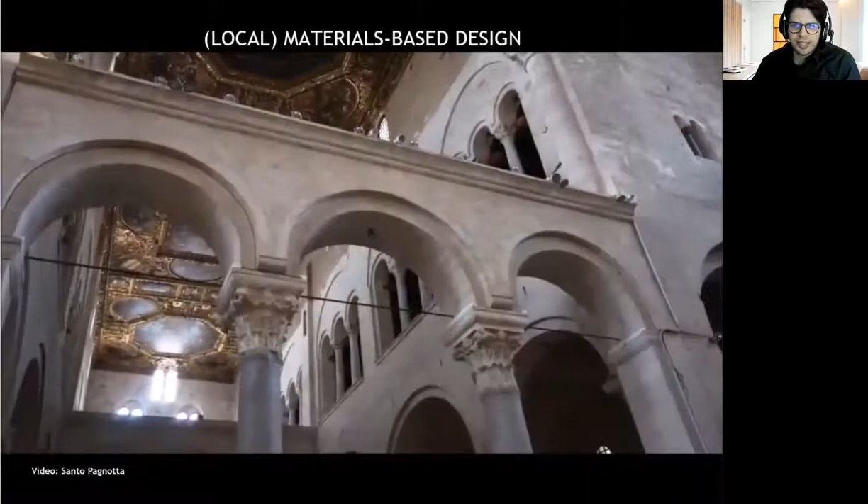And I'd like to start my presentation talking about the place where I come from, because I was born in a region called Puglia in the south of Italy that is characterized by the millenarian use of stone for building architecture. This is the Bari Basilica, the Basilica of my city, which is the best example of Puglian Romanesque architecture from the Middle Ages. So to me and for the people coming from certain regions of Italy, like Sicily, like Puglia, it's common to talk about stone, to talk about vault structures, you know.

And I've started this presentation this way because I believe we should design in different ways depending on where the building is located. I know it's not always possible in modern times, but I think it's important to study the characteristics and the materials of local architecture prior to starting designing, in order to preserve and evolve the history of local identities. I think it is important, and for this reason, it's important to start from history.

So knowing the history of construction, the history of architecture, can be a good starting point also for doing innovative design. It's not something related only to the study of historic structures, historic architecture, but this can be a good starting point for new design and innovative design processes, I think. This is particularly true for stone architecture because it has centuries of history behind it and a huge heritage that constitutes some of the best architectural examples of the past.

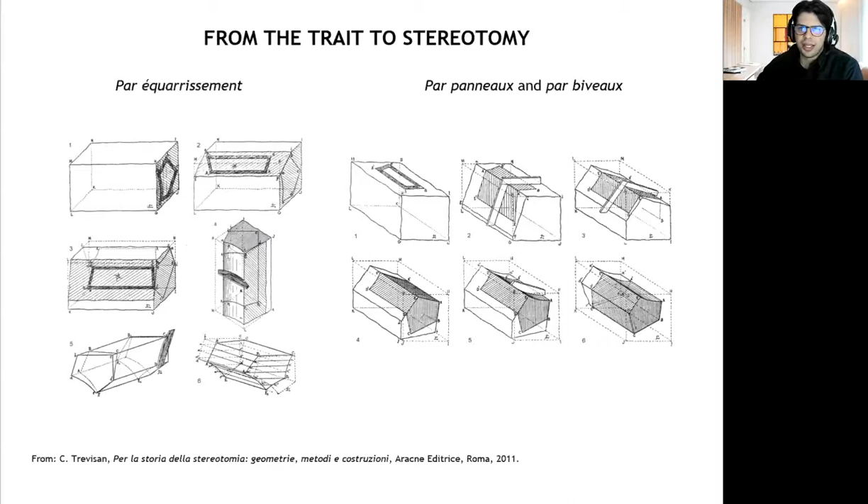Stone stereotomy is well known in the history of construction and architecture, and the term was coined for the first time by Jacques Curabelle, but the history comes from the Middle Ages, from the stone master masons who built cathedrals in France, for example. Stereotomy derives, as I said, from the medieval stone cutting techniques, which have also evolved to allow the optimization of the voussoirs production, the stone blocks, and the creation of more complex architectural shapes.

It is particularly useful to use stereotomy techniques when we need to build complex geometries and when we need to control them from the early design phase. So when you build something complex in shape or in its building elements, it's very important to control both the whole shape, the general shape, and also the geometry of the constituent parts. So stereotomy is not only a tool, it's a way of starting to imagine a new type of architecture. It can sound a bit strange, but you will see that maybe it's true.

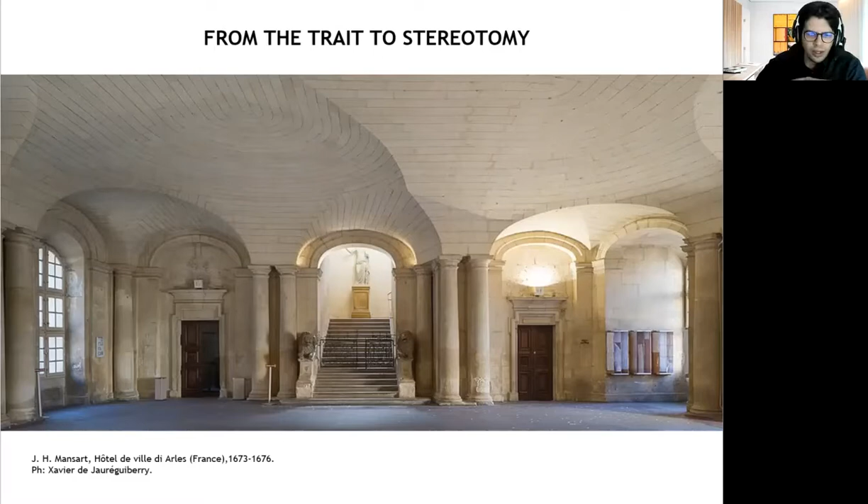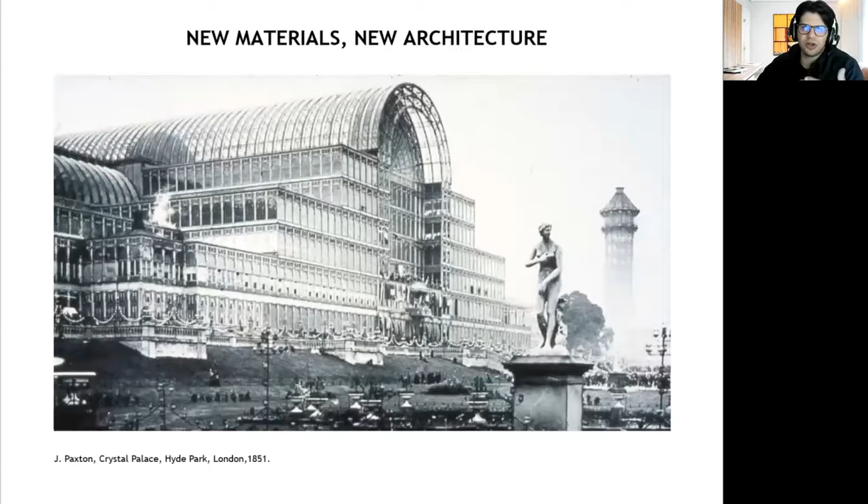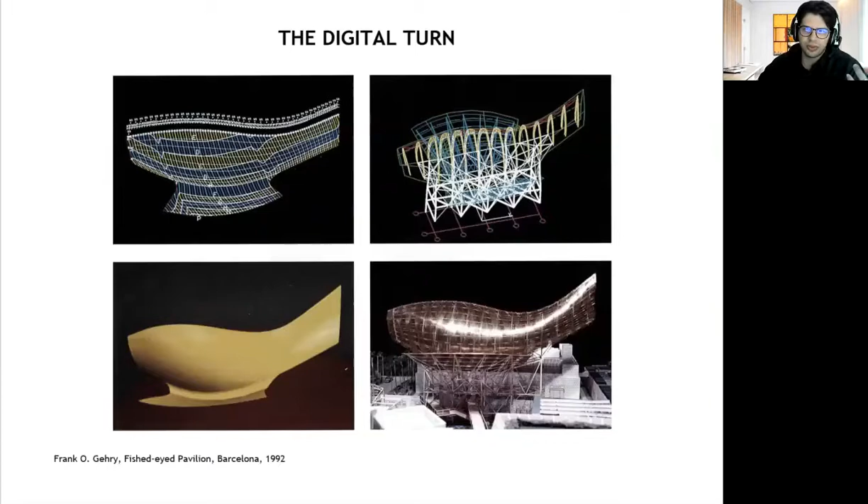But I go fast. The event that changed the recent history of architectural design is certainly the digital turn, which has given the ideal conditions to overcome the contraposition between modern and postmodern architects. The massive diffusion of computers for design has completely changed the reference paradigms of the discipline, I think, finally allowing the development of new architectural languages deriving from new design methods.

Why am I saying it? Because I think that this passage, this historical turn, the digital turn, has created the ideal conditions to renovate, to innovate, to use again some old practice like stereotomy, because it's strictly related to architectural geometry, and most of the computational and parametric design processes are related strictly to architectural geometry, also to the optimal production of blocks of building elements. So there is a strict relationship between architectural geometry and fabrication, and that is an important aspect that stereotomy has always faced.

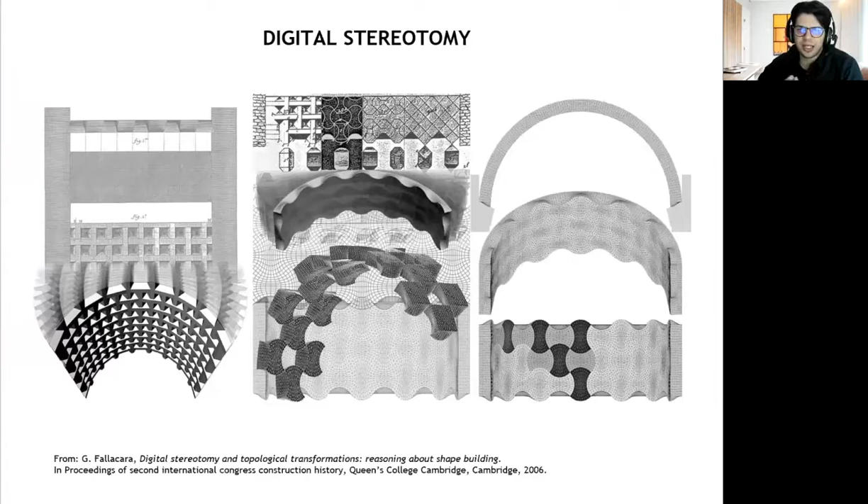As an architect and designer, I've started to think about how to take advantage of these digital tools and how to find a way to express their potentialities. In the same years, the introduction of digital technologies led to the development of digital stereotomy, which is an update of the discipline made possible by the spread of parametric modeling tools and CAD/CAM fabrication systems. Today, in the scientific literature, the term stereotomy is used in a broader sense because it has partially lost its traditional association with stone architecture, approaching the definition of science of cutting solids without any reference to a specific material like in the past with stone and timber.

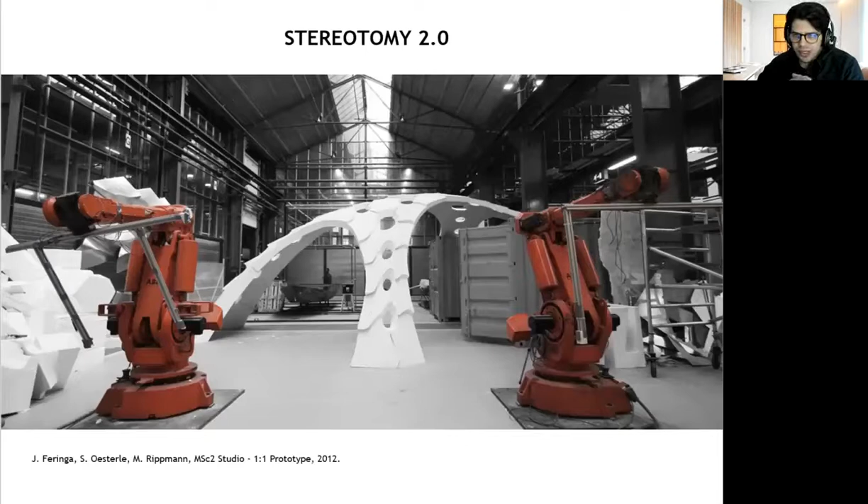This is what they call Stereotomy 2.0, and in 2018 with my former supervisor Giuseppe Fallacara, I edited an entire volume of the Nexus Network Journal about Stereotomy 2.0, which included an unfinished manifesto. In this contribution, we stated that Stereotomy 2.0 is closely related to the use of digital design and manufacturing tools like robotic arms. We also affirmed that with Stereotomy 2.0, we should investigate the unexpressed possibilities of the discipline and overcome the limitations imposed, for example, by individual materials. Maybe we can use composite materials born from the union of materials with different characteristics.

And in this sense, I've been lucky in the last years to collaborate with companies and other designers in the realization of several prototypes in different fields, such as architecture, digital crafting, and industrial design. In the field of industrial design, for example, I've supported the company Generelli, a Swiss stone and marble manufacturing company, in the design and realization of some experimental projects, in order to show the possibilities opened by the use of thin marble reinforced with carbon fiber. The carbon fiber has been used to absorb tension stresses, so we have been able to reduce the thickness of the stone and make it thinner and lighter.

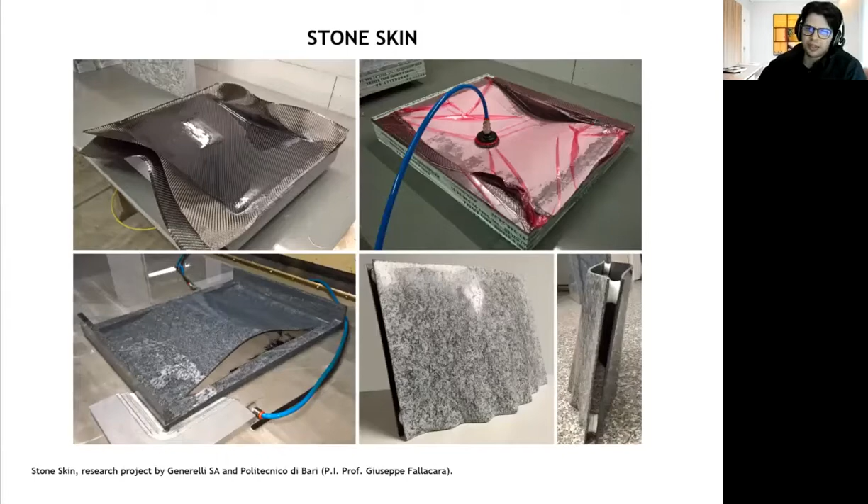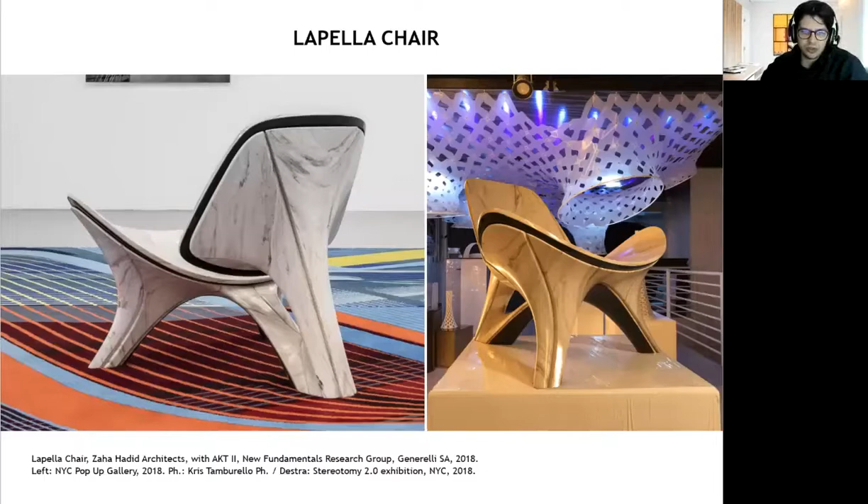The fabrication process is based on the freedom permitted by robotic fabrication and employs vacuum bonding to join carbon fiber layers to thin marble, granite or stone. The most notable example of this research is the Lapella chair, designed by Zaha Hadid Architects with the support of AKT II, an engineering firm from London, and my research group, the New Fundamentals Research Group, and realized by Generelli. The Lapella chair has been exhibited in New York City at the Stereotomy 2.0 exhibition. Due to the free-form shape of the chair, we carved the constituent parts from several small solid blocks.

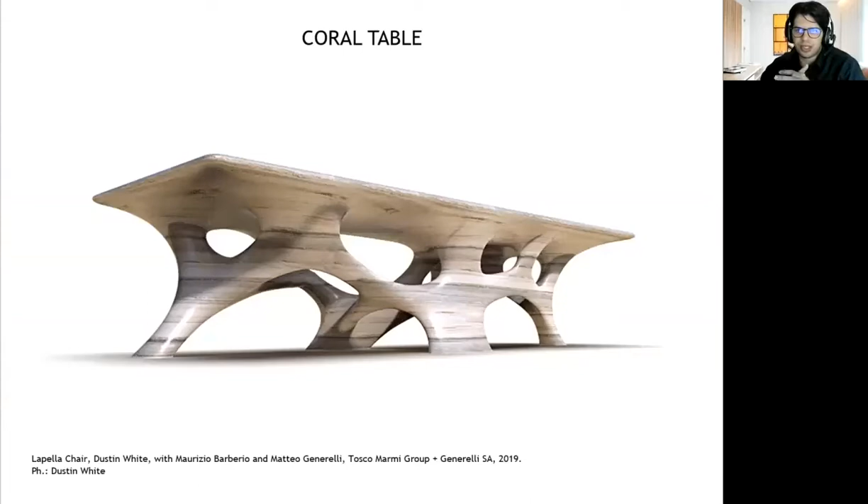Another project I worked on is the coral table that has been exhibited at Marmomacc Verona in September 2019 and has been designed by Dustin White with my support and fabricated by Generelli for Gruppo Tosco Marmi. We proposed a large format table design featuring a continuous woven minimal surface geometry to be fabricated in Palissandro marble,

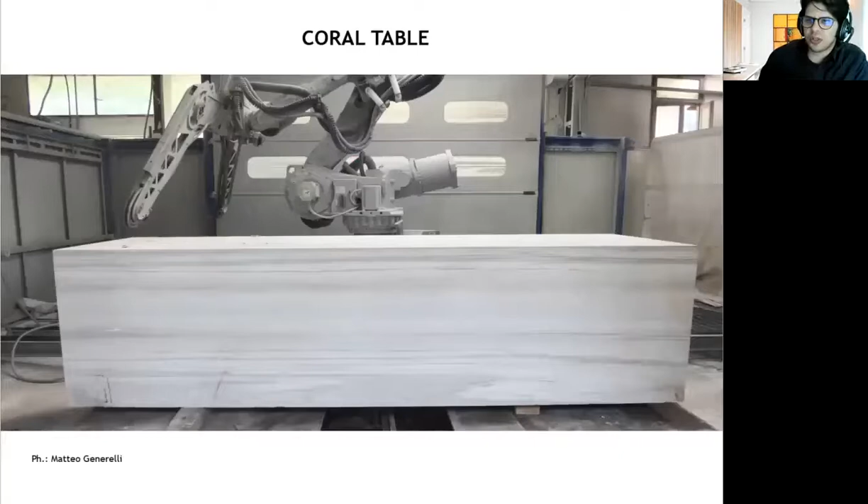which inspired us to design an organic shape, taking inspiration from phenomena like erosions of the rocks and coral reef growth patterns, so biologic and natural phenomena. And we started from a single solid block of Palissandro marble, so very true subtractive processes. And we cut away some parts of the block by using wire cutting.

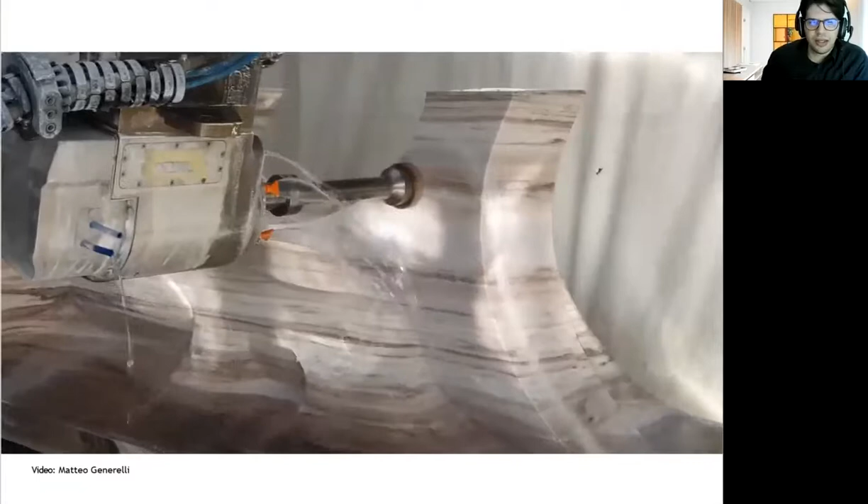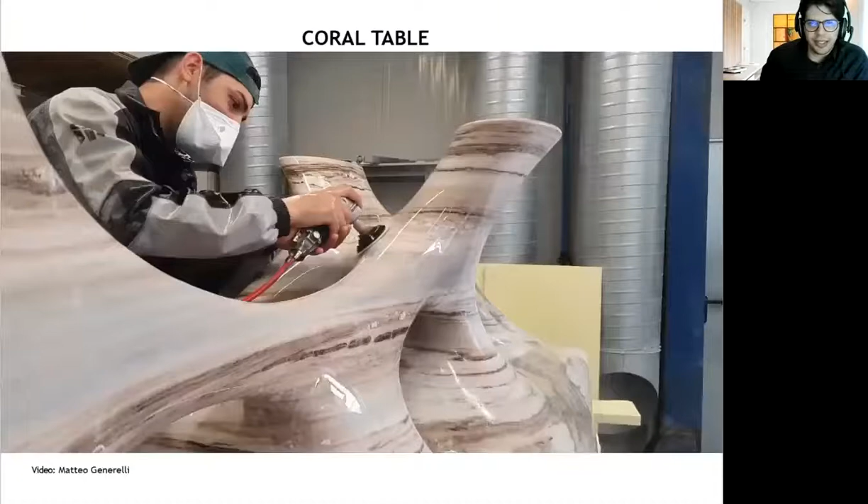And after that phase, the robotic arm milled away the marble layer after layer. So it is a long process. Very, very long. You can see the robot in action. And the interesting thing is that after the raw process made possible by robotic fabrication, the final polishing has been done by hand by highly skilled artisans.

And I think it is an interesting aspect because in the stone marble field, nowadays there is a merging of traditional and handicraft skills and the most advanced robotic and CNC processes. I think this is very interesting because at the end you have a hybrid product that contains the characteristics of the robotic and the CNC processes and also the human touch. So this is very, very interesting.

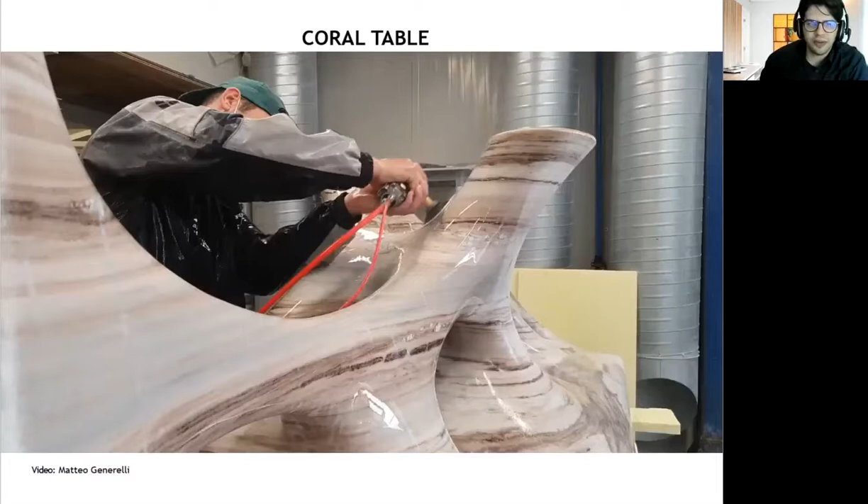In this case, we designed it for an exhibition that aimed to highlight the uniqueness of stone and natural materials from the imitative materials like synthetic stone or porcelain or glass, some materials that are used in architectural projects to imitate stone, to imitate marble.

And in this case, we started from something that you cannot imitate because it's a huge block of marble, and the geological stratification of this block has been modeled by the organic shape. So we have a combination of history of geology with the new techniques, new design processes. So I think it's interesting.

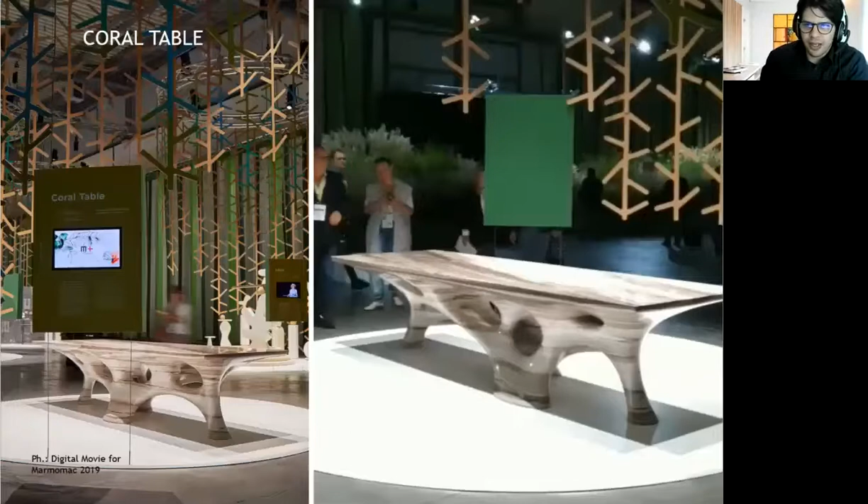This is a quick video given during the exhibition in Verona. We were excited to show the table because, as I said, it's a perfect example of blending between robotic and artisanal skills, which is a key aspect of the evolution in stone design and fabrication that I mentioned previously.

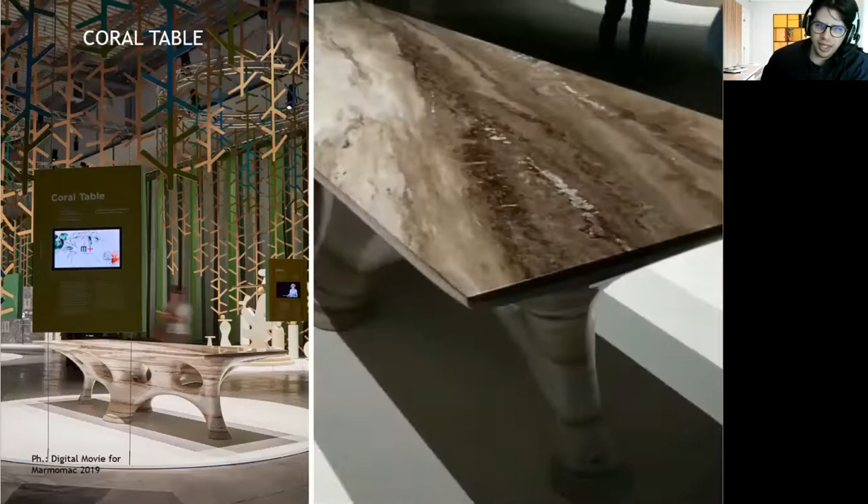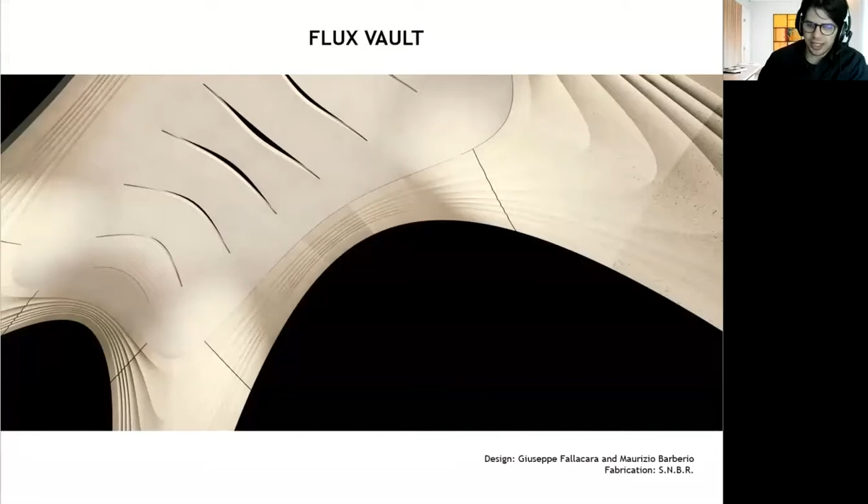The next project that I want to show is the Flux Vault. That is a vaulted pavilion designed in collaboration with Professor Giuseppe Fallacara and the French company SNBR. The pavilion has been the representative stand of the SNBR company during Rocalia in 2017 and also in 2019. Rocalia is the French fair dedicated to natural stone, and it is held in Lyon every 2 years.

Flux is, I don't know, if we define it, a vaulted structure. Maybe it's a blending of 4 arches, but it covers an area of 36 square meters and has a maximum height of about 3 meters and 20 centimeters. The shape of the structure derives from a base structure formed by a network of catenary curves in such a way to make the vault subjected almost

only to compressive stresses. That is a key aspect when you design something that is built in stone, because stone has a very high resistance to compression stresses, but very low resistance to tensile stresses. So it's important to control the shape of the structure. It's important to control the thickness, because we need the forces and the stresses all around the structure to not affect the equilibrium of the structure itself. It is very important.

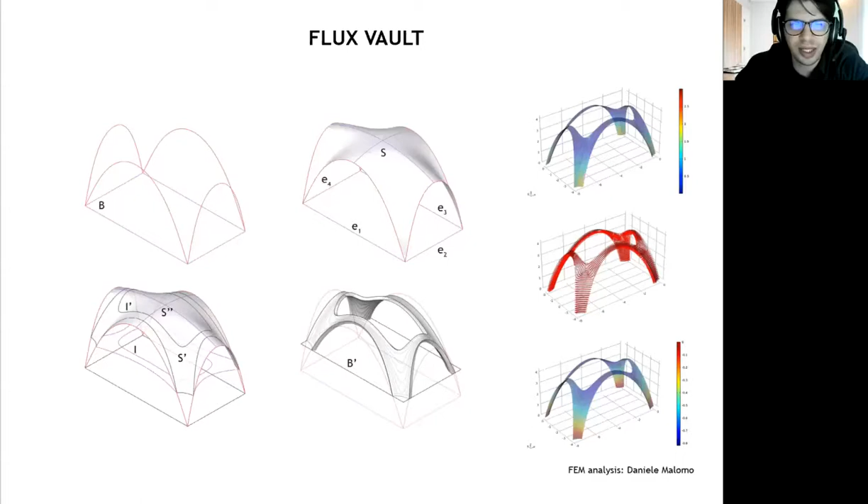So that's why we base the design shape on catenary structures, because using catenary curves we can control better the equilibrium of the overall shape, the equilibrium of the block. But another very important aspect in this case was the speed of construction of the vault, because we had only 1 day to build it.

And there are other 2 important aspects to face with this project. One was it was not possible to use a falsework, so we used a structure, you will see, that was made from supports, not using a true falsework. And another aspect was to design the blocks in order to lift them using very limited instruments.

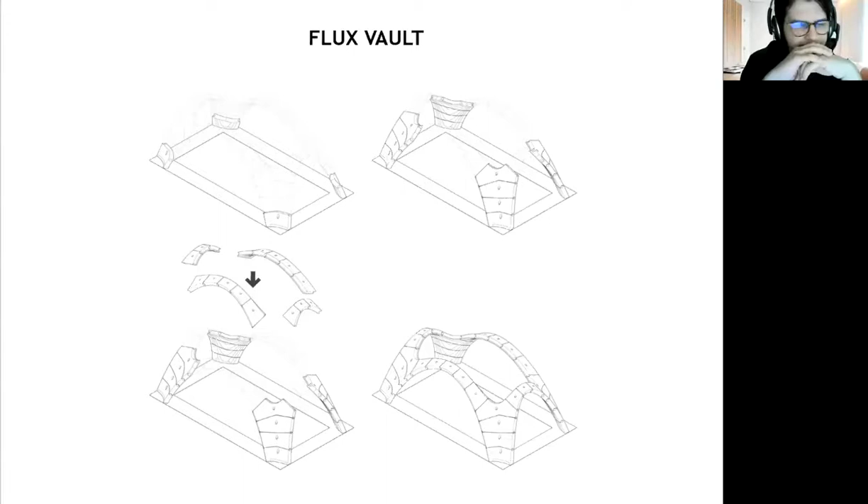Each block has been designed to weigh less than 500 kilograms, which is not too much using stone, to facilitate assembly and to be produced by using robotic fabrication tools. And another important aspect of the project is that each contact face among the various voussoirs presents metal fixing systems. It has a bolted fastening system placed here on the plates and at the outer edge of each block.

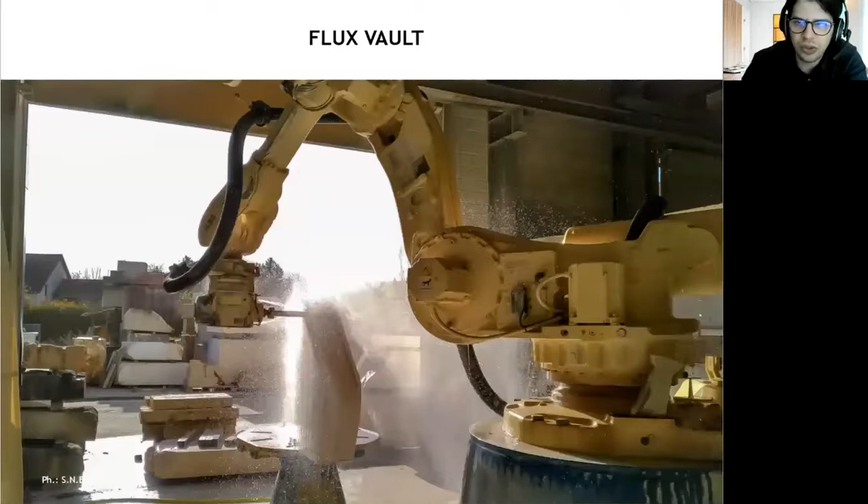And due to the complexity of the stone blocks to be produced, robotic fabrication is the most appropriate technique to use, because we used wire cutting to cut the contact faces between blocks, which are completely flat, and we used also milling for carving the overall shape of the blocks and their sculptural aspects. You can see here that is a relevant factor in this project. Maybe there is a video here or not. No.

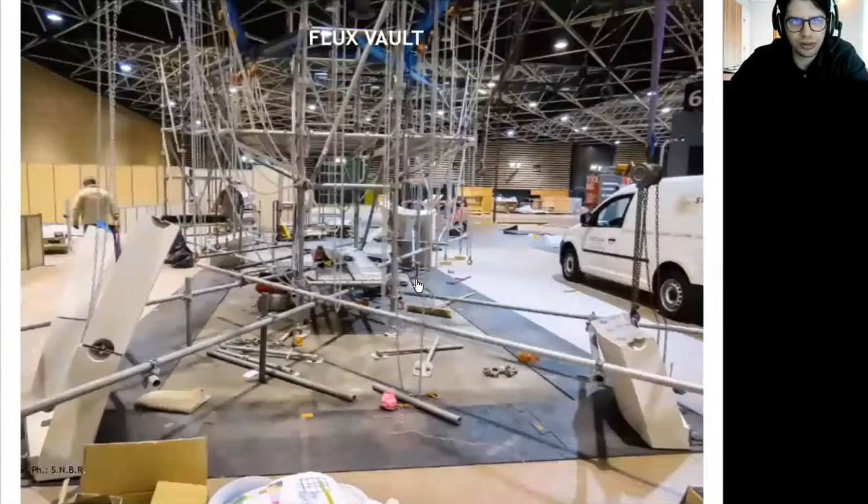Okay. I thought that was a video. Not sure.

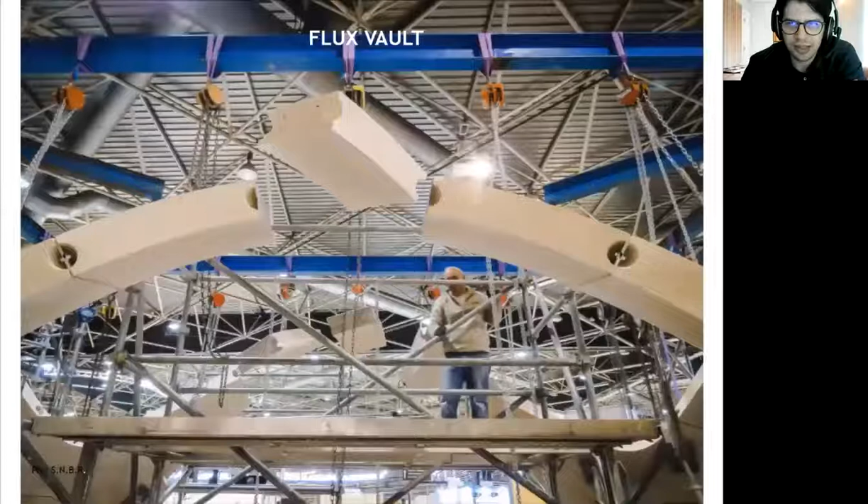Okay, yes. The precision allowed by robotic fabrication is a key aspect of this project, also for its construction, because the details we designed have permitted us to assemble the structure in just 2 working days without producing waste in scaffolding. In fact, each voussoir was lifted from above and temporarily attached to a metal frame structure placed above the vault, and each stone block was positioned and mechanically fixed to the subsequent ones until the keystone was placed in position.

This is a new construction technique in stereotomy. We experimented with this prototype for the first time, and it has proved very efficient. I think it has also improved the mechanical behavior of the structure, because this kind of metal plates, metal fixing system, has made the structure more elastic, which is a bit strange concept related to stereotomy structures or masonry structures, because they have to be very, very rigid.

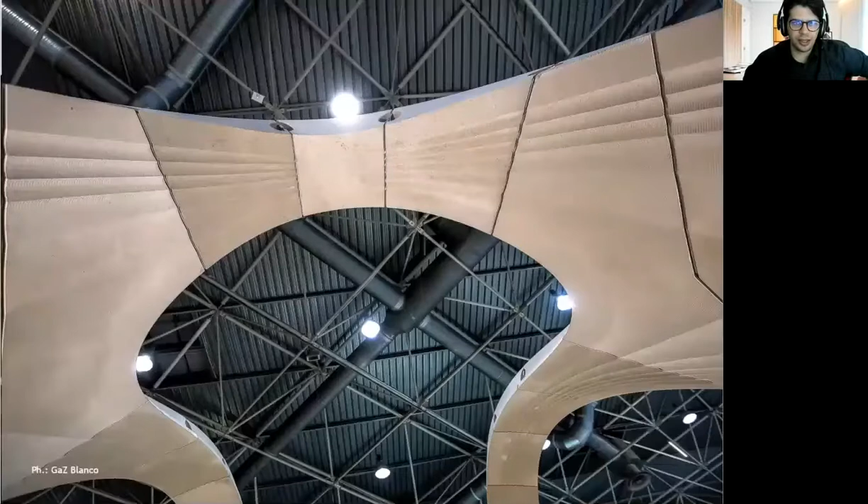In this case, we combined the rigidity of the stone, but also the possibility of micro movements between blocks. And it was a very great experience. Also because the fabricators, the SNBR company, were very skilled both in robotic fabrication, very precise, very perfect, I can say, and in assembly, which is very important, because if you have perfect blocks but you're not able to assemble them together, you surely will not get the ideal result. So this aspect is very important in architectural construction.

The sculptural relief of the intrados recalls the flow of internal forces of the structure. So it's like a representation of the structural behavior of the pavilion, and they proceed from the arch to the ground seamlessly. On the other hand, the presence of the sculptural relief intends to enhance the technical capacity of the latest generation of CNC machines. And on the other hand, they represent a possible way to revamp the sculptural tradition that has always characterized stone architecture in a contemporary way.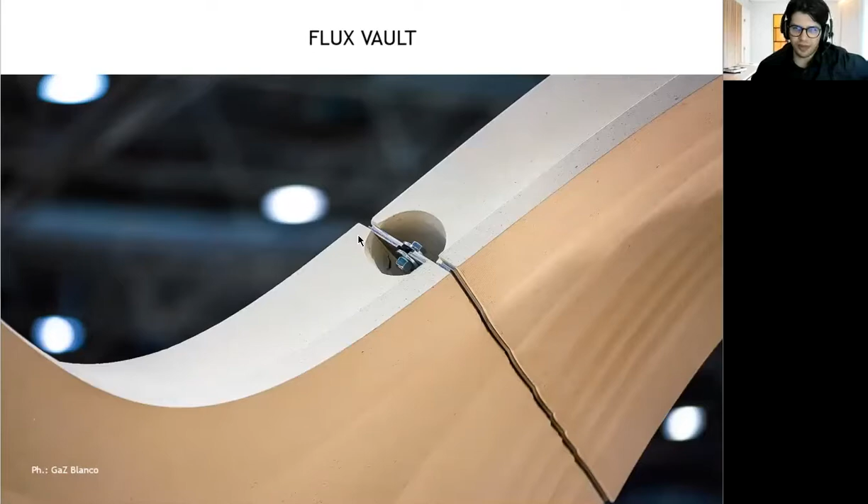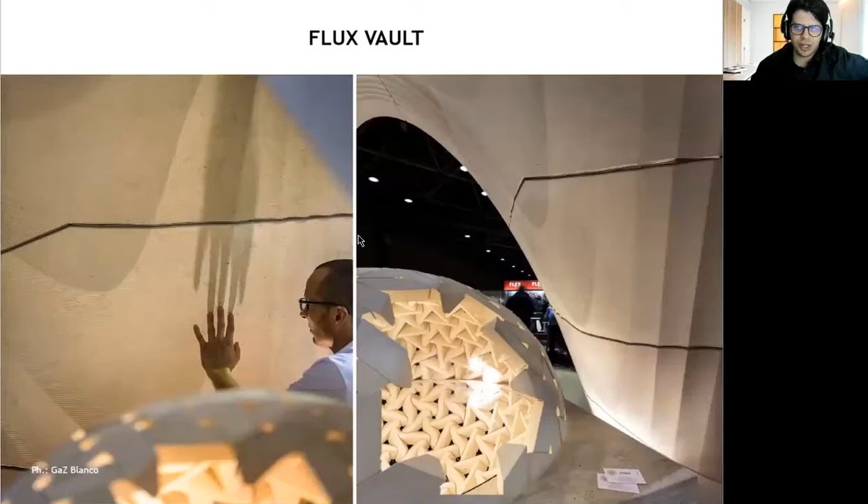There are some pictures of the finished pavilion and some detail pictures. You can notice the very high precision of the robotic manufacturing and the details of the metallic connection between blocks. These are other pictures taken during the Rocalia fair in Lyon. You can also see the interaction, the tactile exploration from the audience, which is another very interesting aspect when you use digital technology, because we may think that something produced with digital technology is perfect, but it's not true. Here it's possible to notice the milling layers, the milling path that the robotic tools leave on the stone surface, and it's interesting to explore them by touching. So I think this is a fascinating aspect to highlight.

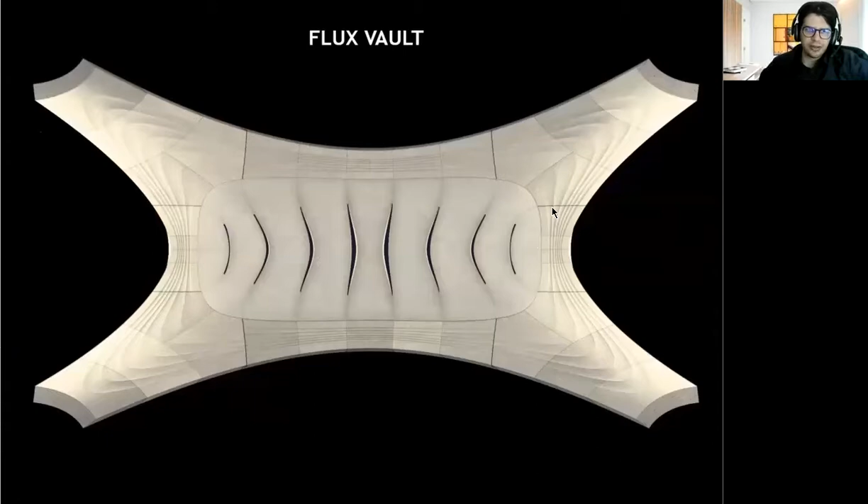In the initial project, we also designed a cap to be made by micro concrete or 3D printing. However, for budget and time reasons, the top of the vault has not been realized yet. I think it will never be realized, really. But I'd like to show it, because maybe we have a bit of contrast between the two parts, but I think contrasts are also interesting in architecture sometimes.

Another option would be to continue to build the cap by following the contour lines of the structure, as you can see in this picture. I think this is a good option to optimize the construction of this kind of pavilion, because in this way we can install the arches first, and after that continue layer by layer to place blocks until the structure is finished, always using very limited and reversible supporting structures, and not using falsework, which is always a problem, because it's like you have to build two structures: the support structure that at the end you have to waste, and the structure itself.

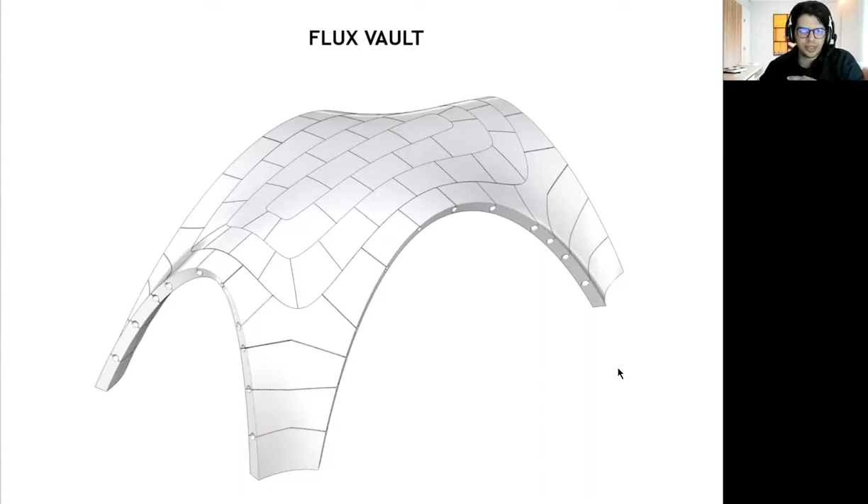So I think, in order to make this kind of structures and architecture more sustainable in terms of budget and also environmental aspects, it is better to make some efforts to avoid the construction of waste materials, waste falsework, I think.

Other pictures have been taken during the Festival Européen de la Pierre two or three years ago at Château des Rohan in Saverne, which is a very good location for this kind of project, because we are in a historic context. And the same vault probably made more trips than me in the last years, and has been built again at the Venice Biennale. The pavilion is currently exhibited there, in the installation curated by Professor Giuseppe Fallacara, called Porzione di Infinito, namely portion of infinity. So if you go to Venice, you can see it, and maybe you can send me some pictures.

But if subtractive techniques seem just the digital update of the handcrafted techniques used for centuries for classic stereotomy, additive manufacturing techniques are opening new scenarios for the discipline. I go fast. Projects developed with subtractive techniques are characterized by a series of critical issues. Maybe you noticed some of them during my presentation, because we have to deal with limitations in the fabrication of complex shapes, waste of material, and its appropriate disposal.

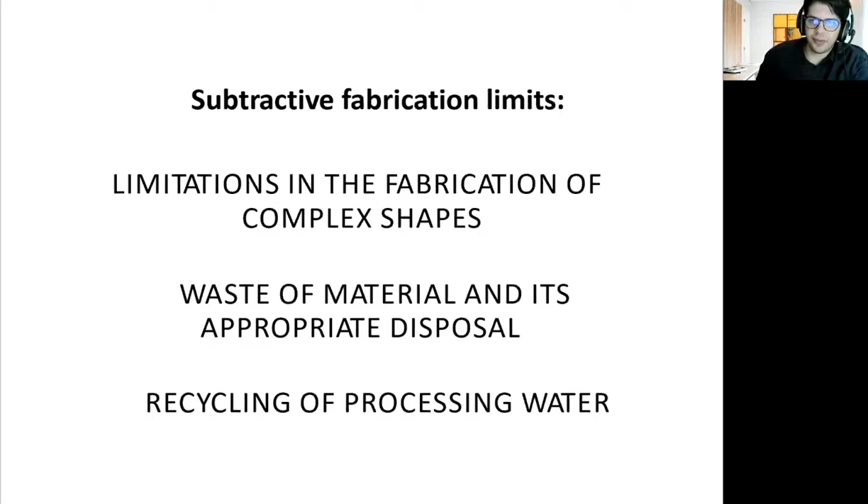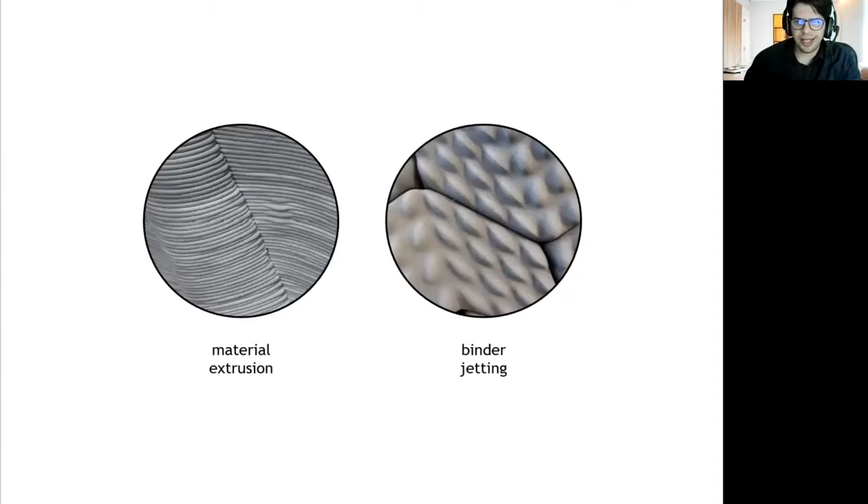Waste of material and its appropriate disposal, and also recycling of processing water. Many of these limitations could be overcome with the transition to additive manufacturing techniques, I think. Today, further methods and tools for additive manufacturing have been developed, characterized by the use of different materials and different manufacturing processes, to which corresponds a degree of precision appropriate to the scope of its application. In the field of construction, in my opinion, the most suitable additive manufacturing techniques are material extrusion and binder jetting. We will see some examples now.

The different approaches to additive manufacturing can be classified into four categories: extrusion of wet compounds for the manufacturing of monolithic buildings, extrusion of wet compounds for the manufacturing of discrete elements, solidification by layers of powders for the manufacturing of, again, monolithic buildings, and also for the manufacturing of discrete elements. Now, additive fabrication of monolithic buildings aims to bring down costs and construction time, realizing ever bigger 3D printers. This is an idea that is currently on the stage.

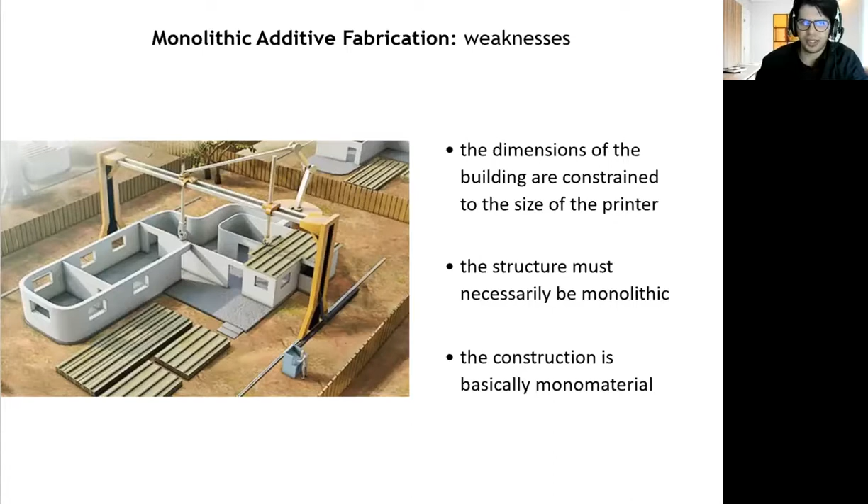However, this objective poses, in my opinion, several critical points, because the dimensions of the building are constrained to the size of the printer. Obviously, the structure must necessarily be monolithic, and the construction is also monomaterial. So I think these are weaknesses of this kind of monolithic additive fabrication process. In contrast, we can also use discrete additive fabrication, which has a lot of potential, because it opens up the possibility of working extensively with non-standard products conceived and created for a specific project. So in terms of mass customization, they are very good. And with the use of materials that are more appropriate to the nature of the project, or, also an important aspect, locally available.

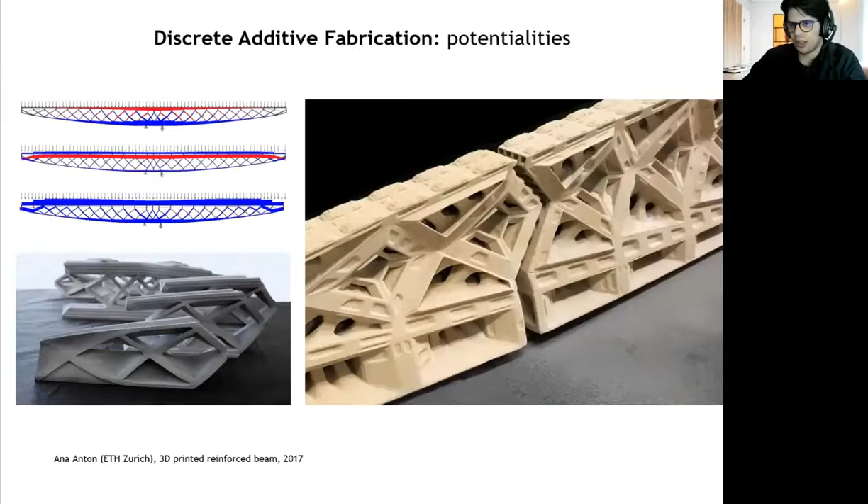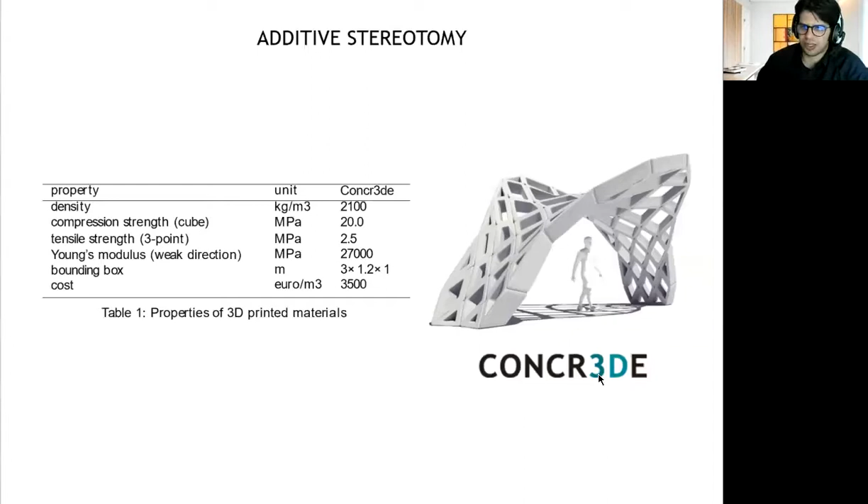The main idea that we had was to design a big open space, which is not so common in stereotomic architecture, covered by a series of adjacent arches. So we have not a true vault system, but a shape made of stereotomic arches.

And these arches under permanent load are thought to be statically independent to form a sort of false vault. I know it can sound a bit strange, but the use of side-by-side arches allows the creation of free-form barrel vaults in which the overall shape of the structure is not conditioned, is not constrained by the static functioning of a traditional vaulted system.

Because, you know, traditional vaulted systems have to follow a precise shape because we need them to stand and not collapse under the load. And sometimes it's not always possible. It's impossible to have, for example, anticlastic shapes. But maybe we are interested in exploring these kinds of shapes for architectural reasons. So static structural behavior is not the only relevant aspect in architecture. Maybe we aim to explore other aspects, other kinds of shapes, other kinds of forms.

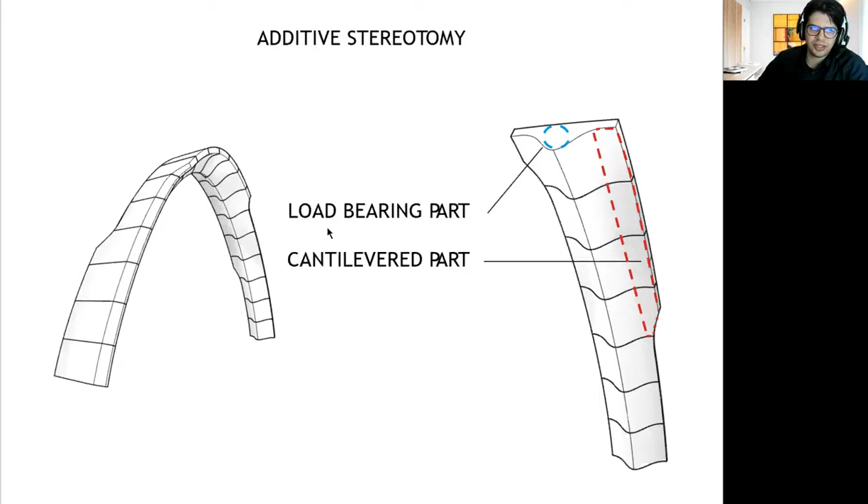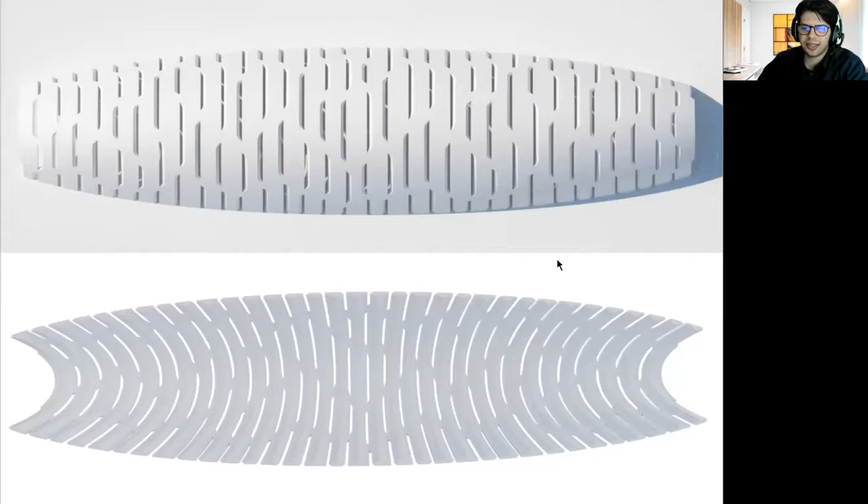The variety of these cantilever parts makes the variability of the openings, which is another difference from classical stereotomic shapes, because they are usually completely closed, since we need to create the structural equilibrium by friction between all the blocks. In this case, we have independent arches, so because they are independent, we can create some openings between them, and the structure stands.

The cantilevering side parts can be shaped in such a way as to create differentiated openings to permit natural light to come in. At the same time, we can imagine inserting artificial lighting systems integrated into the structure. And the project was developed internally in Grasshopper to create a close synergy between parametric design and computational engineering.

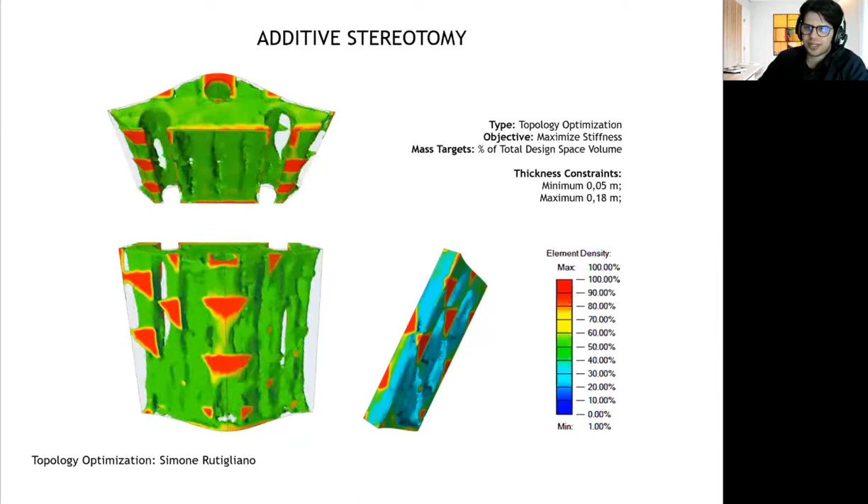Another idea we explored was to make these blocks topologically optimized. We have worked with Simone Rutigliano, former graduate student in architectural engineering, on topology optimization of the voussoirs in order to achieve constant stress by using material only where it is needed. The entire arch is pre-stressed by tendons to deal with live loads and allowing the assembly and disassembly of the arch. And Summum Engineering with Diederik Veenendaal determined the shape of the arch and the volume fraction of the voussoirs to achieve constant stress, as well as the amount of pre-stress to keep them in compression under external loads.

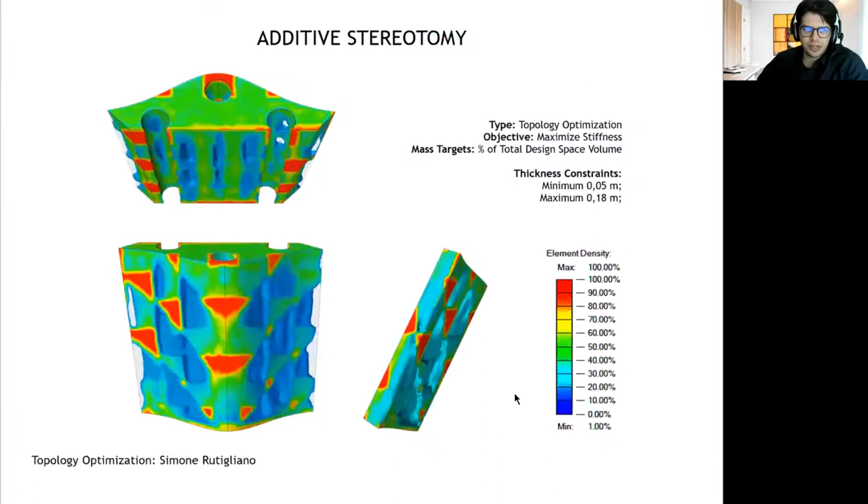You can see these percentages are related to the volume fraction inside the blocks. So the idea is that the shape of the blocks outside is completely full. It's like we have here, you can see the shape completely full, but inside the volume of the blocks changes every time depending on the position of the block itself and depending also on the amount of loads to be faced by the block.

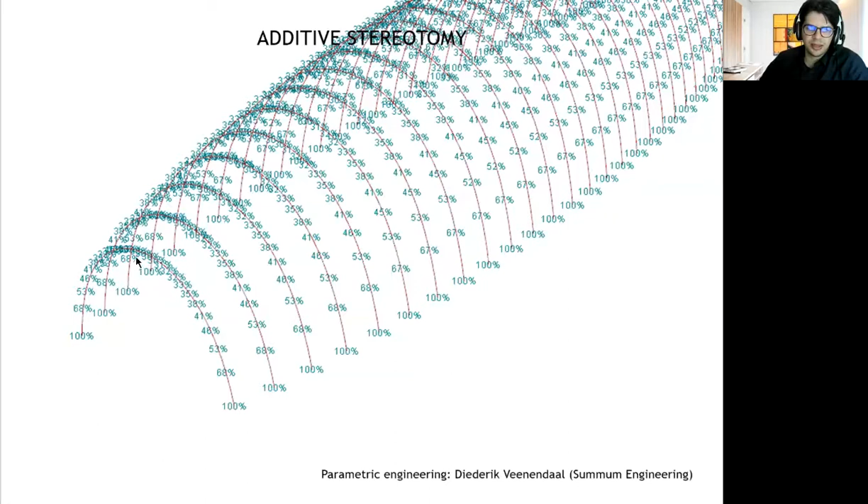And in the lower part we have blocks that are almost completely full or full. And in the middle of the arch, we have blocks that resist less stress, so we can have less volume. Maybe they are emptier.

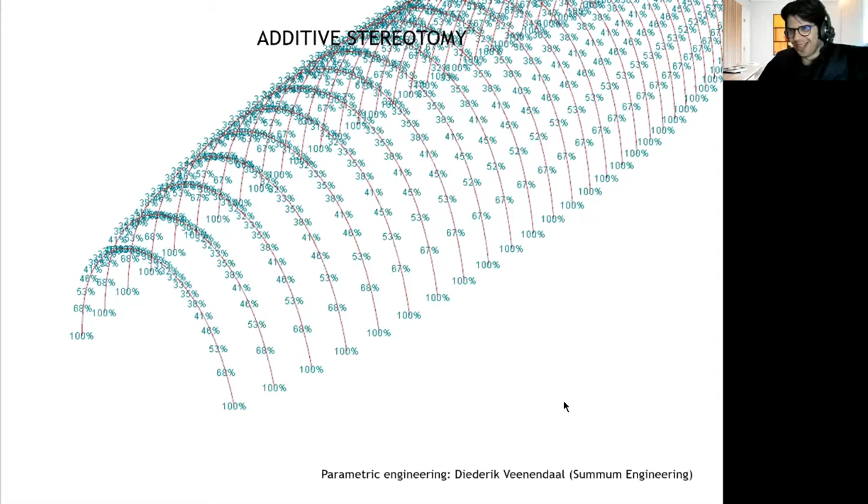I have to explain it to make it understandable. It's not so easy for me to explain in English, so I hope I have been clear. Sorry? I totally feel your pain about explaining something in English that is not your mother language. Yeah, it's not my mother language, but they are also a bit complex to explain in Italian. So the idea is not so easy to explain.

But thank you. The first design application of the construction system has been presented in the exhibition Stereotomy 2.0, held in 2018. Okay, thank you, Rebecca. 2018 at the New York Institute of Technology.

The project you will see is a kind of robotic re-proposal of the famous National Library project designed by Boullée. In our project, we have placed servers and supercomputers along the basement instead of books, as contemporary analogs for the preservation of human knowledge. We had this idea to represent the project.

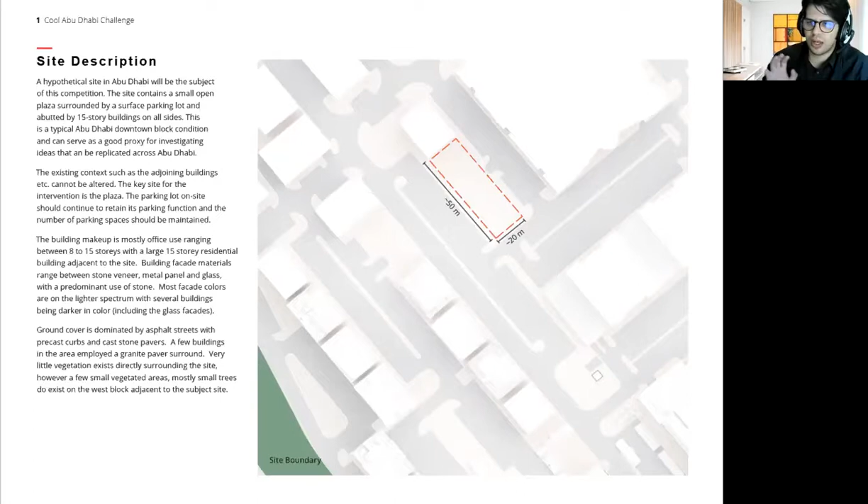In this case, we had a specific site, a specific project schedule, specific project goals, because the project was developed as an entry at the Cool Abu Dhabi Challenge, an international call for designing a new model of covered urban space in Abu Dhabi in order to face the problem of the urban heat island. So in this case, stereotomy has been used as a framework to face a climatic issue.

Due to the urban heat island effect, the city center of Abu Dhabi is estimated to be several degrees Celsius warmer than the surrounding natural environment. You can see here the difference. The temperature of the soil is almost double that of the surrounding environment. And solar absorption and re-radiation from the surrounding context, as well as the anthropogenic heat released by cooling the buildings, and the lack of air movement result in a felt temperature much higher than the prevalent air temperature.

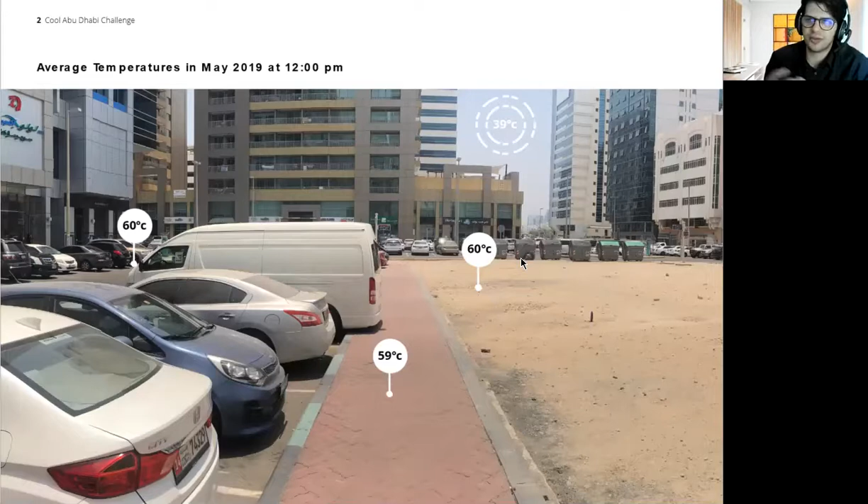So when we stay in these countries with a very hot desert climate, we perceive a temperature that is higher than the real one. So this is a problem, because people don't use urban spaces for this reason. They move from a building to another building. They move by car, but they don't live the city outside. So for this reason, we need to design something that is appropriate to face this problem.

Our design process started from the deep awareness of the climatic context of Abu Dhabi and Emirati traditional architecture, which is composed of elegant vaulted structures, vernacular shading devices, cold water basins, a lot of very interesting and cool elements from the past. If you see Islamic architecture, very interesting. The fact is that they don't want to use them anymore. They prefer to do something that comes from Western civilization, you know.

I don't know if it's stupid, but I don't agree, because they have a very special, very interesting architectural heritage that they could probably reuse or evolve.

A message in the chat. Yeah, that's me. I'm saying I don't either. And I think that it's a trend in all big civilizations to leave aside their heritage and just turn into either Western or contemporary architecture at some point and leave aside all the parts that they built in centuries. Mhm.

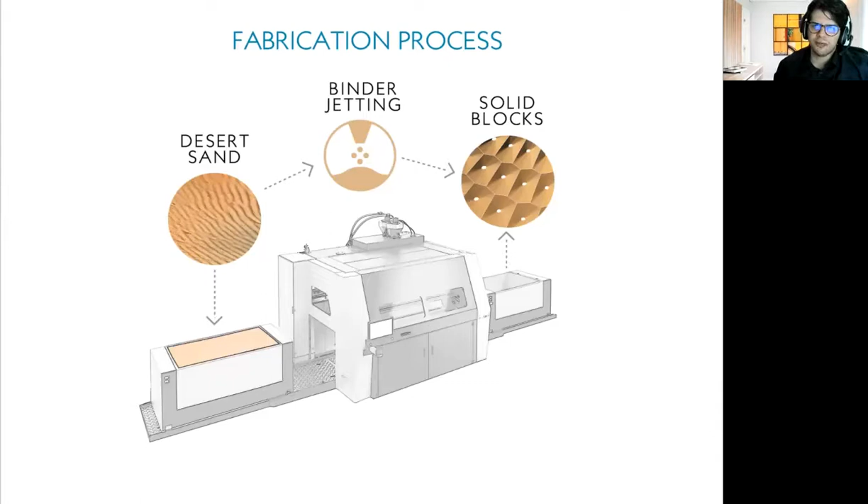and this desert sand can be processed using a binder jetting 3D printing fabrication process, and at the end we can maybe obtain solid blocks, a sort of 3D printed sandstone. And this sandstone can be used as a material to build a vault structure. And this was our idea. It's also very interesting because

Can you hear the music? No, okay.

So yeah, it's not important. If you go to the ExOne YouTube channel, you can maybe see this video. It's a bit long, but it's interesting because they explain how it's possible to set up a factory made of 3D printers that can work together, a big factory of 3D printers that can produce a lot of these kinds of blocks, for example, to use in the construction field.

And again, the concrete printer that I mentioned previously for the additive stereotomy project has developed this big 3D printer that can produce very big blocks. They are specialized in the production of 3D printed blocks for architectural purposes. Because most of the other 3D printer producers maybe use them for rapid prototyping or to make stamps, something that is not appropriate for use in construction, but they are focused on the production of blocks for architecture, which is important for us.

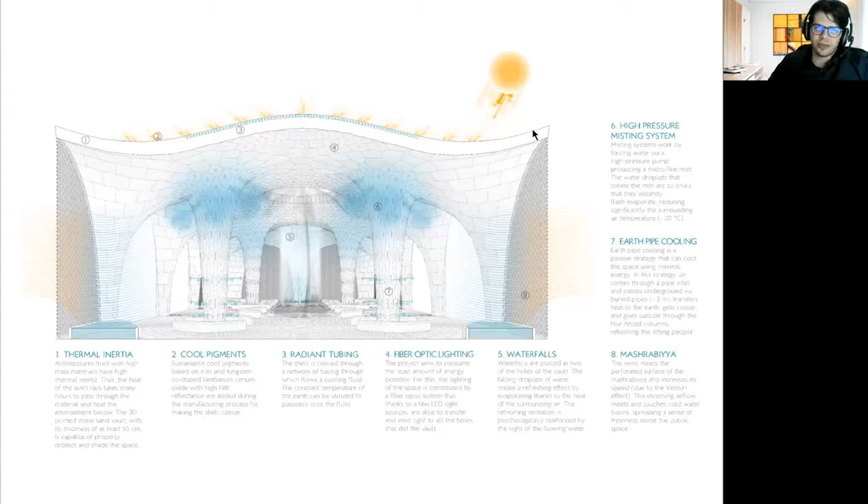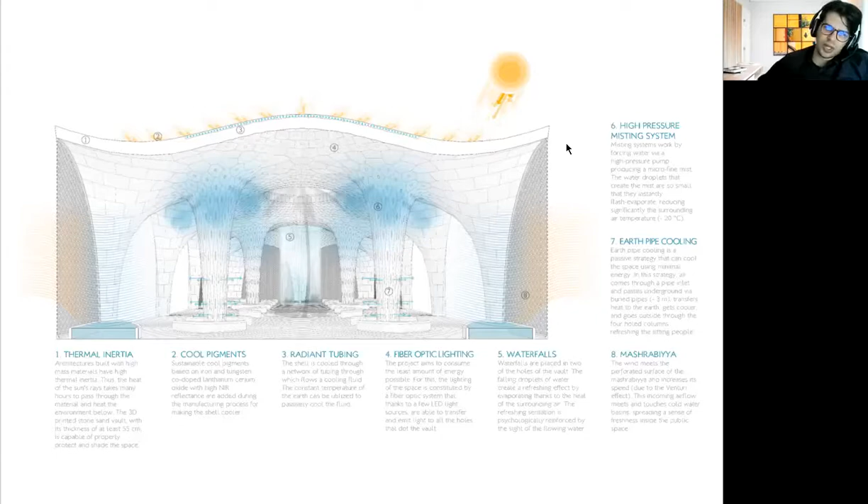So first, when you have a very, very hot climate, the first action you can take is to protect the inside of the urban covered space by using very massive materials. So stone, sandstone, that are very appropriate for this use. And the sand is mixed with heat reflective cool pigments to increase the surface reflectance and to reduce surface heat build up, also reducing energy consumption through lower cooling requirements.

The space below the vaults represents an urban microclimatic space protected from the sun using a vernacular sun shading device, the mashrabiyya, which also enhances the natural ventilation of the space. So the ventilation can pass through the mashrabiyya, but the sun a bit less. The wind meets the perforated surface of the mashrabiyya and increases its speed due to the Venturi effect. This incoming airflow meets the cold water basin all around the space, spreading a sense of freshness inside.

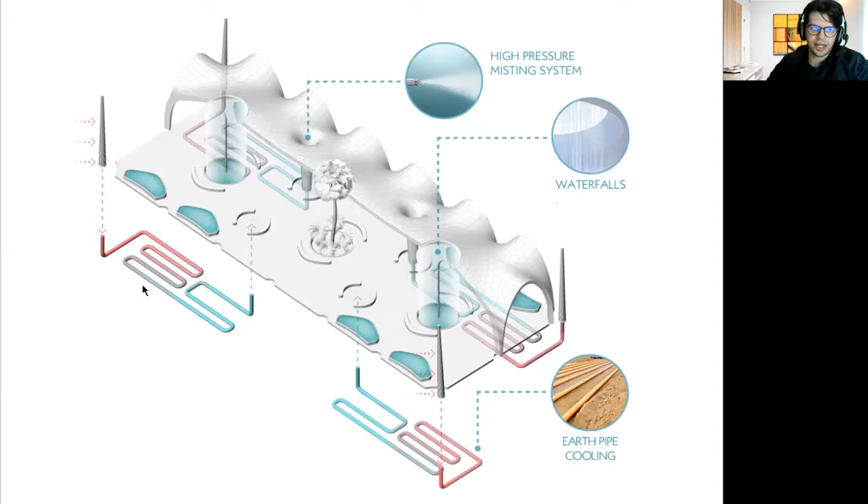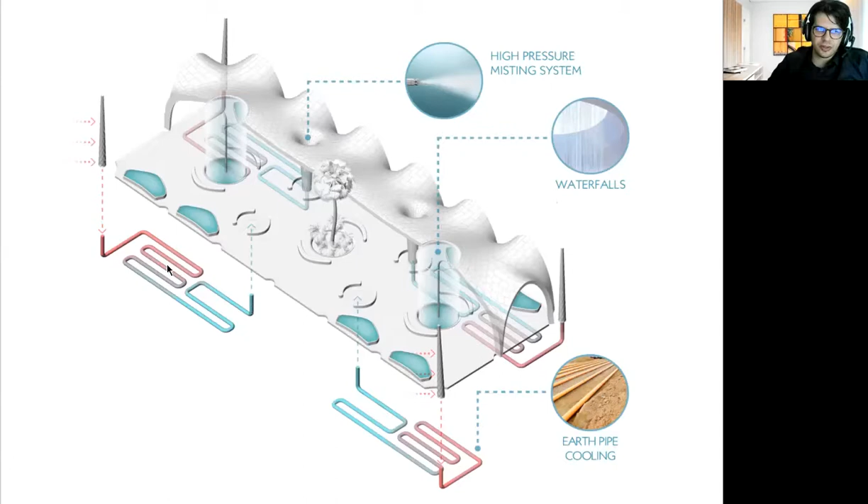In addition, the urban space under the shell is also naturally ventilated with low-tech systems such as earth pipes. We have a mini wind catch tower here. They collect the prevalent winds, and the air passes through this earth pipe, which is fresh because it is inside the ground. It is a low-tech system that can cool the air naturally, and after the air has been made fresh by this process, we can use it to refresh the inside of the vault.

That's why we have these openings here. The openings seem like a decorative part, but in reality they are made to put fresh air inside. Also, we have integrated a high pressure misting system to reduce the temperature inside the vaulted space by forcing water via a high pressure pump, producing a microfine mist. So we use several bioclimatic or low-tech devices in order to make the inside fresher.

I thank Angelo Figliola, who performed the environmental analysis, which certified that by mixing those systems it is possible to reach a UTCI of 26 degrees Celsius for the month of August, the warmest month in Abu Dhabi. That represents a really comfortable thermal perception for an outdoor space.

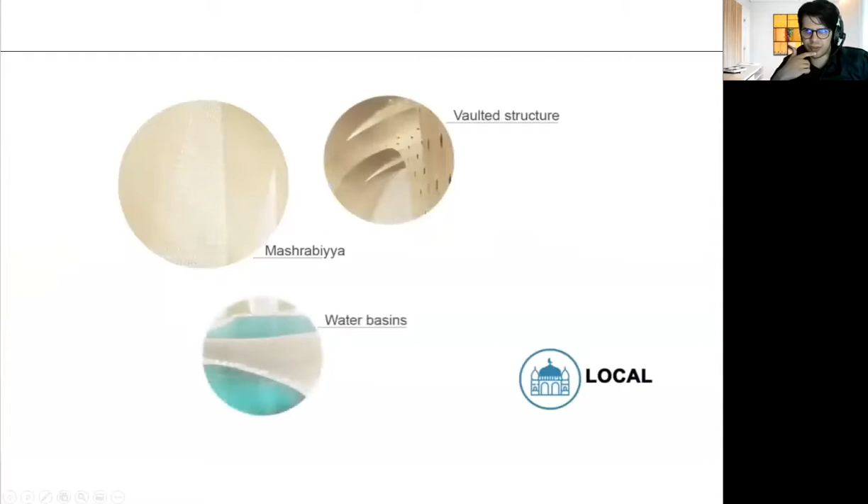This is a short video we prepared for the competition. We didn't win the first prize. We were only awarded an honorary mention, but it was a great recognition, I think, because we know it was a very experimental project, so to be awarded an honorary mention was great.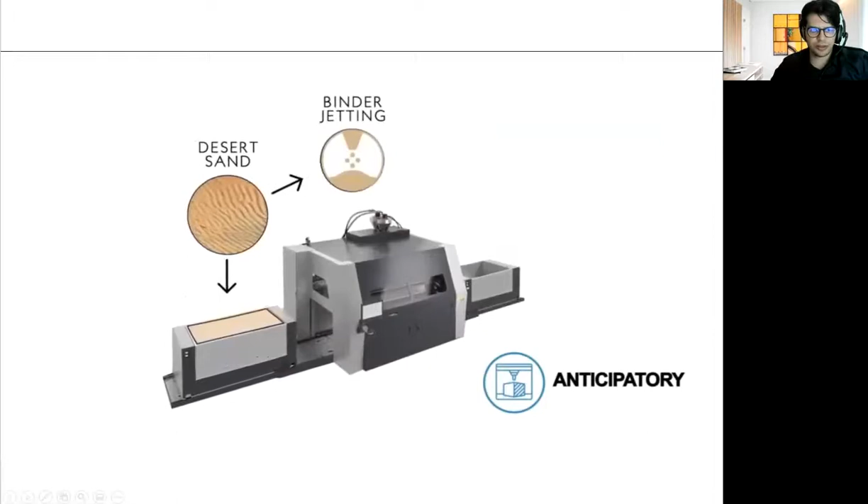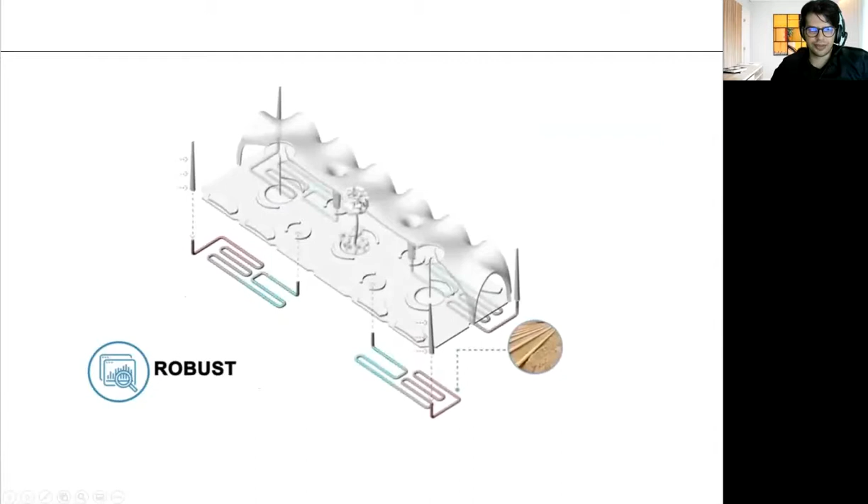I'm sorry, you can hear the music. There is an Arabic soundtrack.

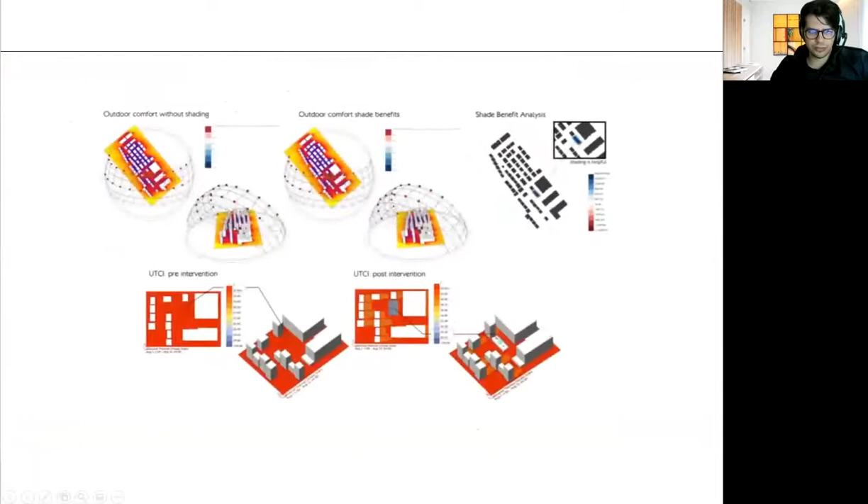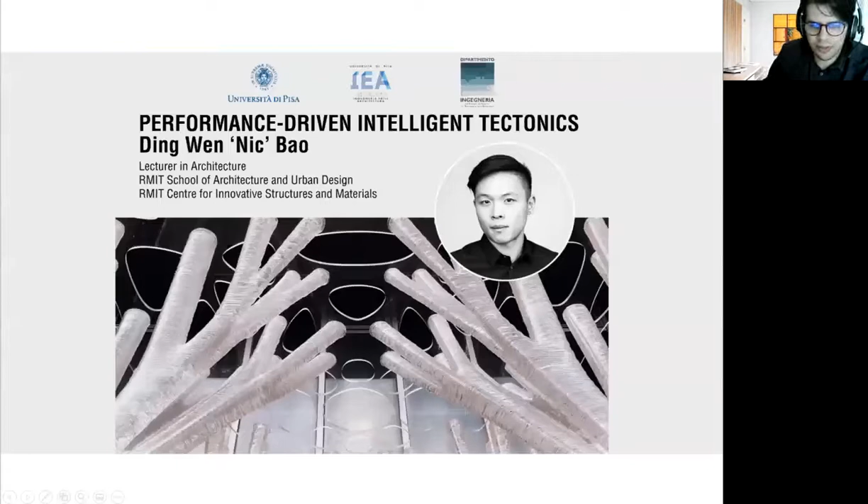So we recently did an online workshop on data-driven additive morphologies, but what's going on? Okay. We had also a lecture from Nic Bao. In this workshop, we tried to also implement other kinds of preliminary analysis, like structural analysis and environmental analysis, in order to optimize the workflow, optimize the design process in the early stage of design.

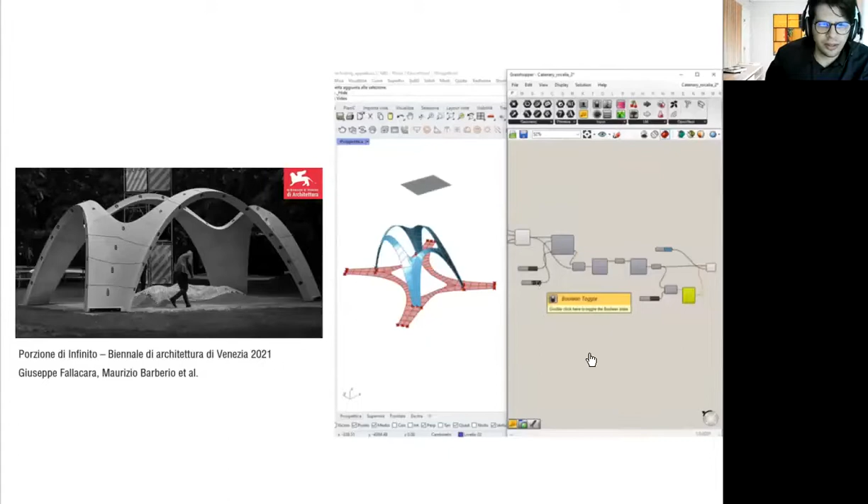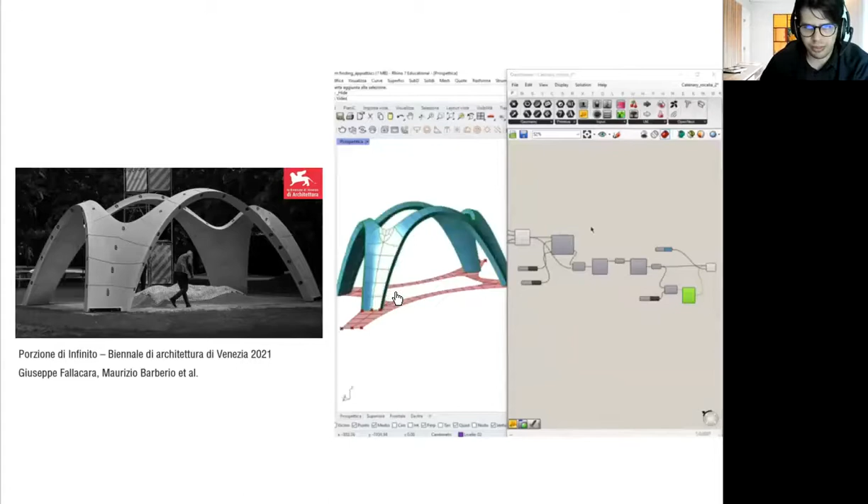But maybe I will not talk about it too much, but an interesting part was to use Kangaroo in order to make optimized shells under compression stresses. You know, the reproportion, restudy of the shape of the pavilion of the Venice Biennale using this kind of workflow. We also developed a workflow using sub-D modeling integrated to Kangaroo optimization.

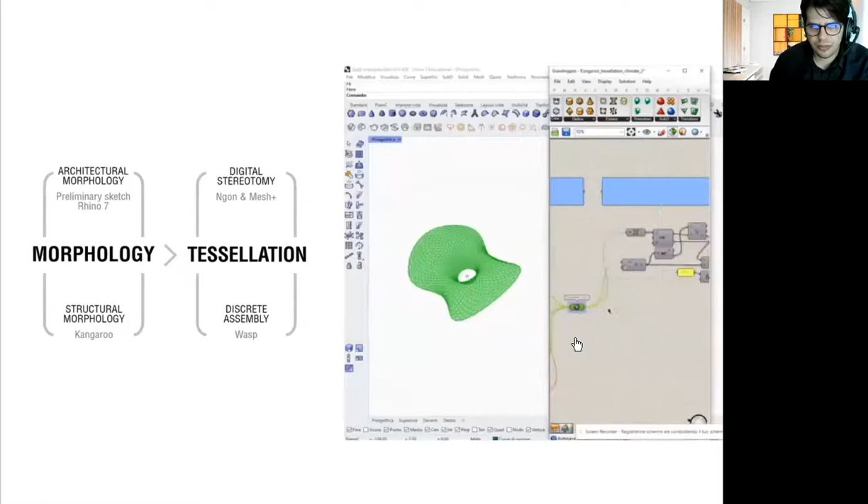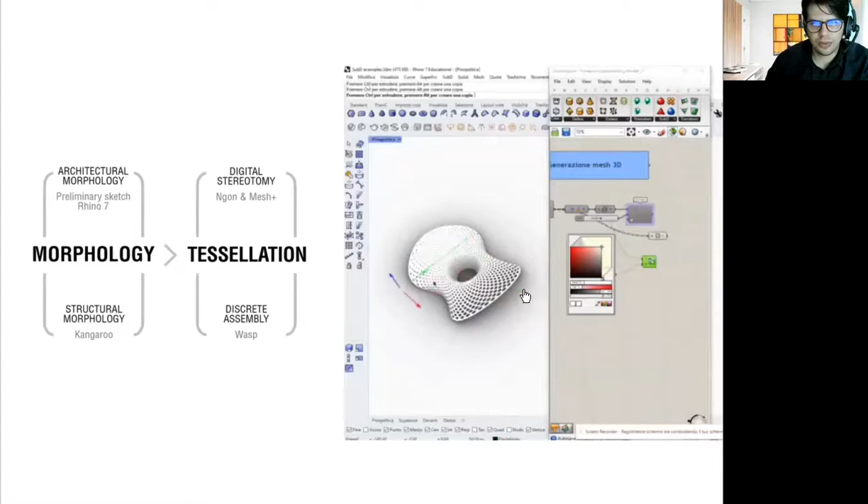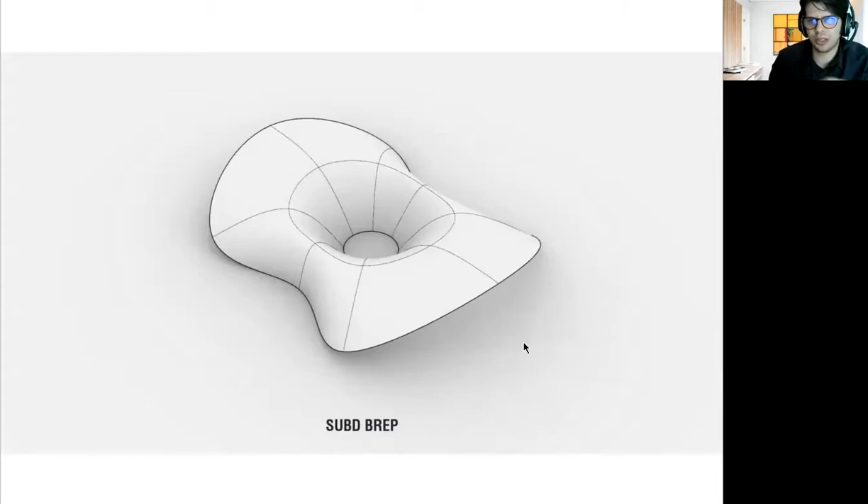Yeah, we developed a workflow in which we started from a coarse mesh, which is a mesh constituted by very few faces, using a sub-D modeling conversion. If you use Maya, you know it very well. It's a way to use NURBS surfaces in combination with the coarse mesh that controls the shape of the 3D.

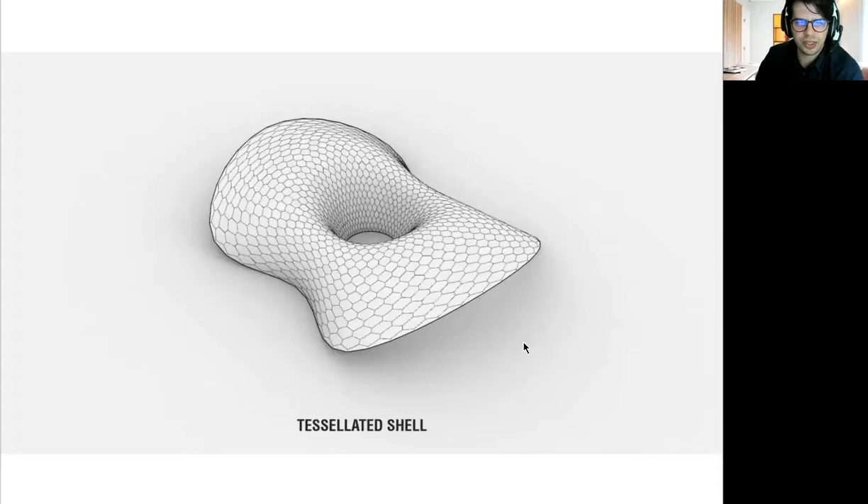This shape has been used as a basis for the form-finding optimization of the shell. Also, we used it for the tessellation of the shell, and this tessellation was analyzed in both environmental and structural aspects in order to extract data and inform, for example, one of the morphological aspects of the shell, which was an open structure in which you can permit lighting to pass through, and this opening percentage, opening ratio, was informed by radiation aspects, climatic analysis aspects.

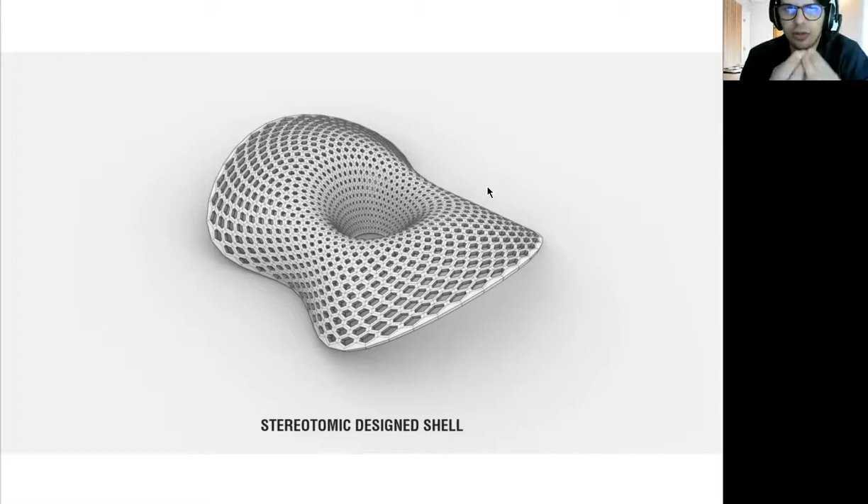So this is a topic we are working on in order to make more informed stereotomic structures. We want to integrate fabrication aspects, morphological aspects, technological aspects, and also environmental aspects in a seamless workflow. This is our new direction. And the next step is to use all of this kind of workflow to make something that is not as simple as a shell, but we aim to design an architecture, with functions, with the program layout.

Maybe the most simple example is to design a complex, or maybe not so complex, roof which covers an area, maybe a building. Inside this building, the interesting part would be to deal with all of the complexity of a real architecture. This is our purpose for the future.

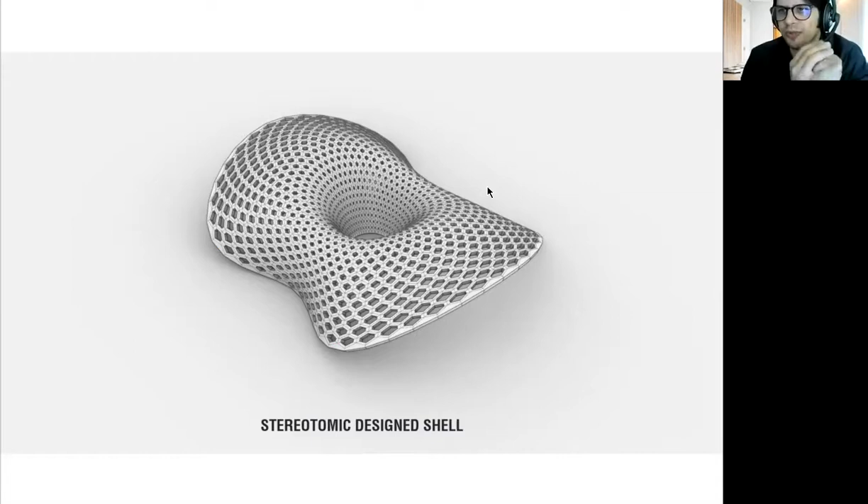Thank you very much, Mauricio. Thank you so much for this lecture. I think that you have a great ability to present such complicated topics in a very clear and simple way that is understandable for second-year students, and thank you very much for doing it. So many questions emerged from this presentation, and I think that we need more than 2 hours.

Before I ask the first question, I want to ask the other members of the panel, the students, if they have a question. Now is your time to ask, because I know that several of you are working on similar topics, and I think that Mauricio today clarified a lot the things that we were discussing during the tutorial. Nicholas, Christina, Sina, Dalia, Rebecca, Darcy, whoever is in the panel.